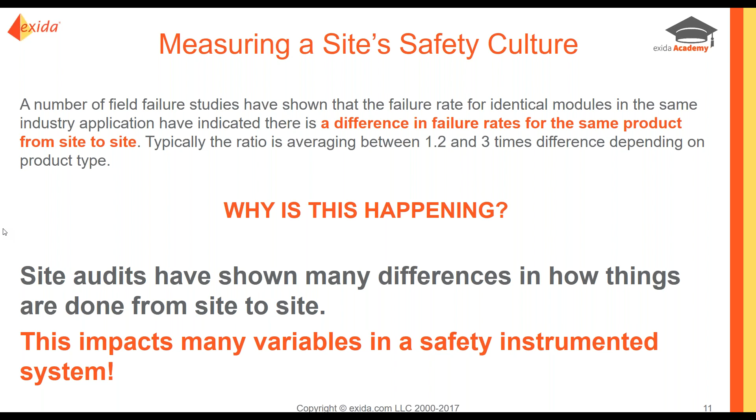So the Site Safety Index will cover all of the variables that can be collected underneath what is safety culture. Safety culture is really the part to play where humans are involved. Safety culture can be an imperfect repair or calibration. It wasn't set up the correct way. All of those things are affected because of humans. I know I am not perfect, and as long as you have humans working in your plant, you're not going to be perfect either. And the more humans do, the more chances that there can be mistakes.

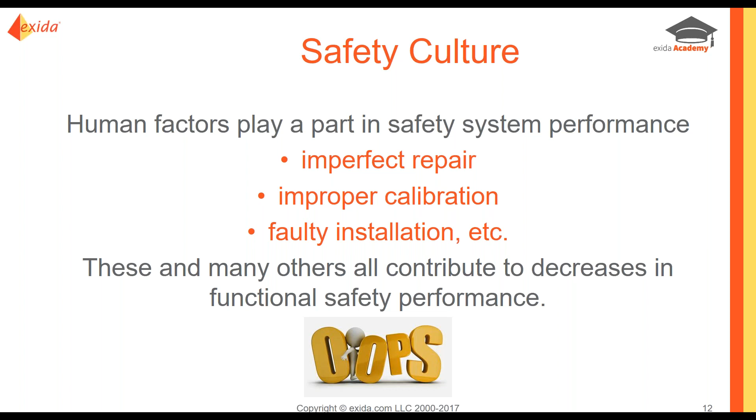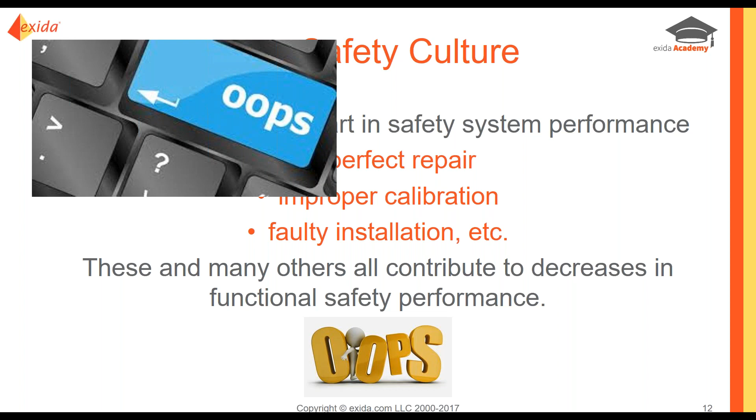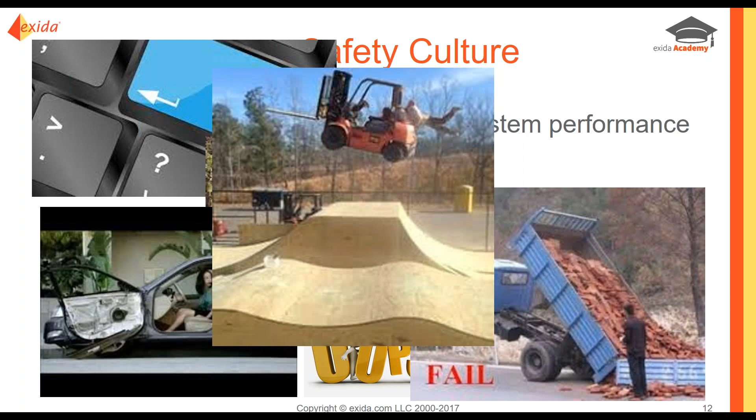Let's think, how many of us today have made typos? I know I've made plenty. My spelling is just plain awful. So I've deleted multiple sentences. But what about even more? Have you done something when you were getting ready this morning? Were you not paying attention and knocked something over? Humans are not perfect. And as long as you have humans working for you, well, hopefully your employees are not going to be doing the things in these pictures, but you get the idea. Things happen. When humans are involved, they especially happen.

But the point is, as long as you have an appropriate safety culture, you can lessen the effects of these, or lessen the amount of these accidents. But if you do not have a proper safety culture, no matter how great your calculations were, no matter if you bought the best, most expensive equipment possible and put it together perfectly, if the safety culture at the plant isn't maintenance-forward, or it's not very good at testing or pushes it out, safety culture can completely cancel out all of the good you did with your calculations, the good you did buying certified products. All of that won't matter because of poor safety culture.

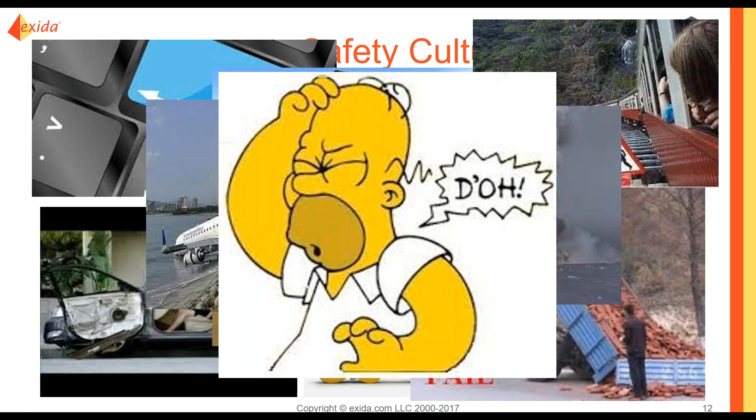Because of this, the Site Safety Index was created, and it was created from all of the concepts based in IEC 61508 and 61511. And from there, we put together an index for you to be able to either self-evaluate or evaluate by third party and see how you are doing. And as I said, as long as humans are involved, the Site Safety Index should also be involved. When you are doing all of your calculations in functional safety, there's an assumption that human factors do not play a part in the safety system's performance. So all of your calculations did not include that human factor error.

So the Site Safety Index allows you to take a more realistic approach and look at what role human factors will actually play. But the second thing: say you have that one company where Site A is doing very great and Site B is doing not so great. You do not want to be punished for your sister company's neglect. So Site Safety Index actually allows you to lower your failure rates because of the great things you're doing, while not masking your sister company.

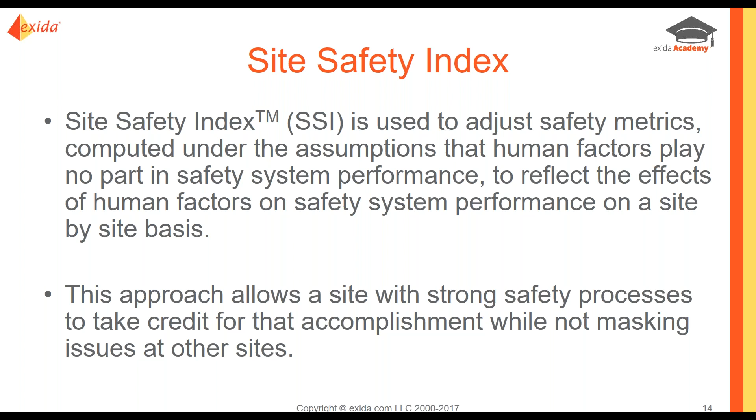As I said earlier, there are two ways you can evaluate Site Safety Index. First, you can have the non-biased approach, an external audit: someone like Exida can come in and walk through, ask a bunch of questions, observe things, and give you a non-biased opinion. That third-party opinion is always a wonderful thing to have. Or you can go through a questionnaire and give yourself a kind of audit and see where you think you fall.

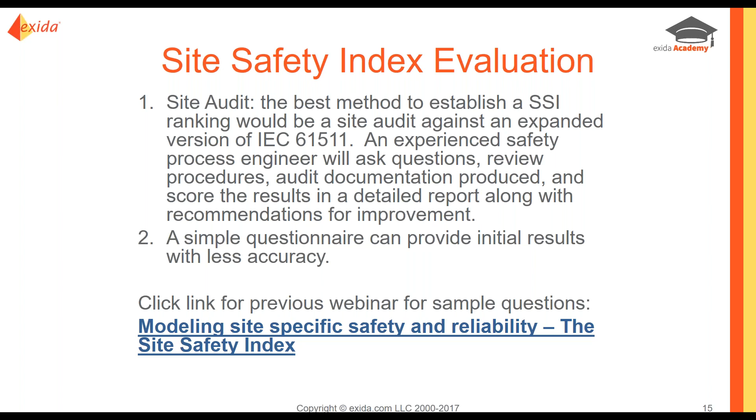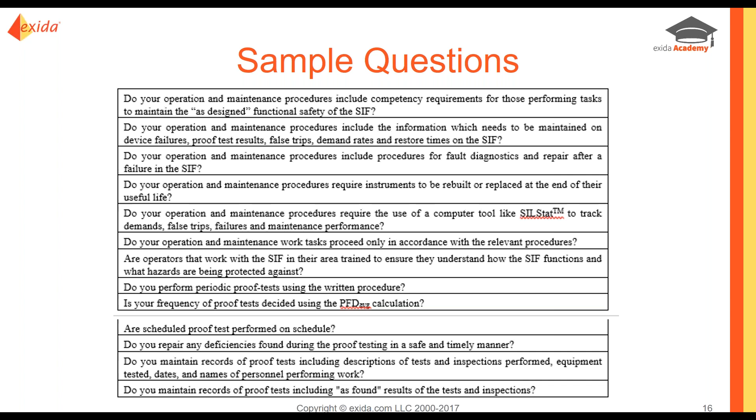Site Safety Index has a website where you can get the questions if you want to do it yourself. These are just a couple sample questions, such as: are scheduled proof tests performed on schedule? Do you perform periodic proof tests using written procedures? Do you pull equipment before the end of useful life? That type of questions. So you can then see about where you fall, or where you believe you fall, compared to others.

The Site Safety Index model is set up kind of like your safety integrity level model. You have Site Safety Index 0 through 4, just like your safety integrity level, or SIL 0 through 4. SIL 0 or Site Safety Index 0 is there's nothing, right? So in Site Safety Index, that nothing means you don't do repairs, you don't do testing, you keep the equipment in. When it finally ends up failing, you pull it out of service, and that's that.

But on the other extreme end, you have SIL 4, or Site Safety Index Level 4. That's absolutely perfect. Repairs are always done on time and correctly. Testing is always done on time and correctly. And you always pull everything before you have any inclination that it needs to be done. Just like your SIL 4, your Site Safety Index 4 is kind of unheard of. It's mythical. It's that unicorn. People have heard of it, but have you really met anyone that has seen one?

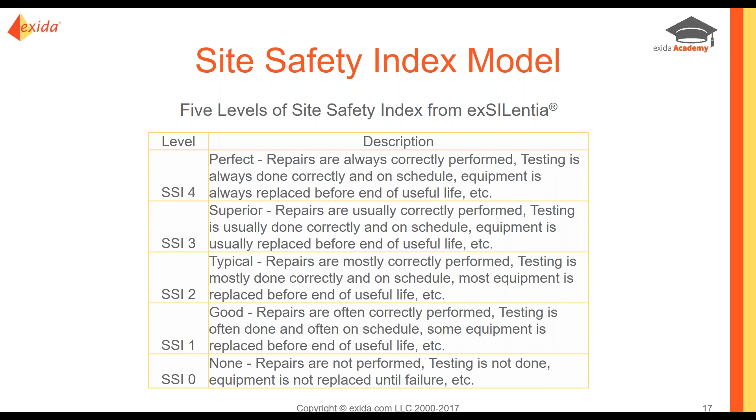Typically, we will assume that people fall under Site Safety Index level 2. You do most of the repairs and testing on time. You do it as correct as you can, but nobody's perfect. And sometimes if you're doing a lot for functional safety, you might be an SSI 3. So I've talked about the different SSI levels. Who cares? Well, it can specifically impact your functional safety.

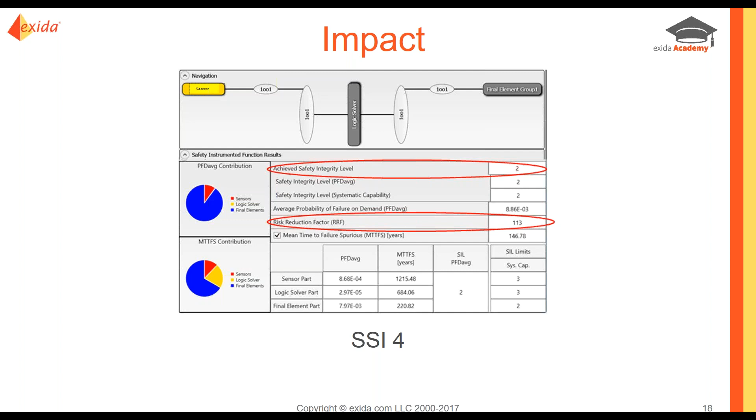I did a quick SIF in exSILentia. This is part of the module if you've never seen exSILentia before. I just did a sensor, a logic solver, and a final element, 1 out of 1 final elements, and ran my calculations and found that for this simple SIF, I was able to achieve a safety integrity level of SIL 2 and have a risk reduction factor of 113. And this is all assuming perfect maintenance, 100% perfect SSI 4.

I then did the exact same analysis, but this time I said that I am pretty dang good. I'm not perfect, but I'm doing almost everything perfect. So this isn't even an SSI 2 or average or typical. This is SSI 3, superior. You have now only achieved a risk reduction factor of 98, which is not too big of a difference, but your achieved safety integrity level is only SIL 1.

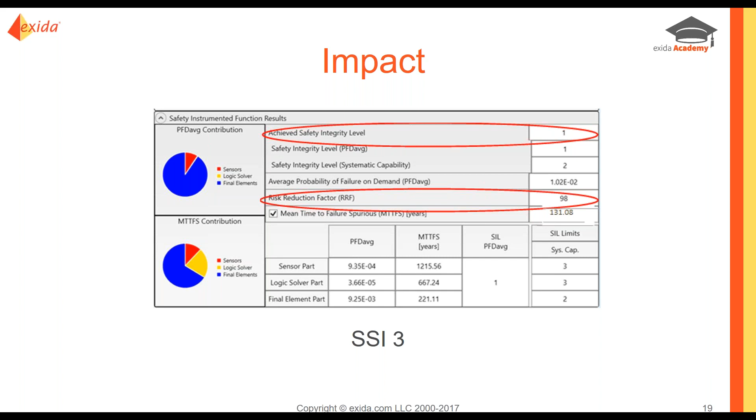And if you've done all of your safety calculations assuming SSI 4, when you are indeed not, you could be assuming that you're running at a SIL 2 level. Well, actually, you are only achieving a SIL 1 in protection. So why is this? Well, a key metric in the process industry and all the design is PFDavg. I'm sure if you are involved in any functional safety, you've heard of PFDavg before.

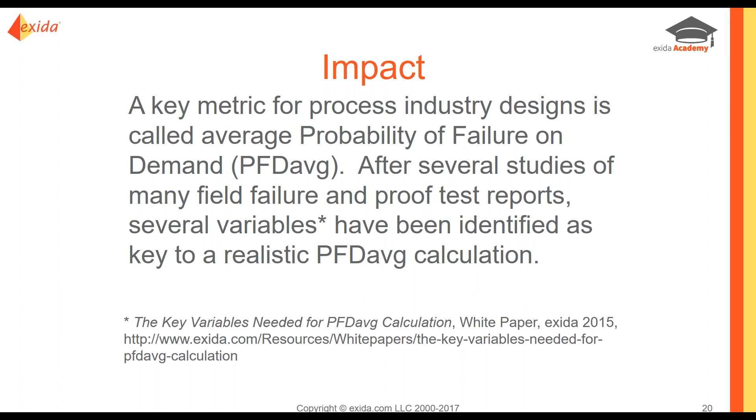And as I said before, we did several studies on many different field failure results and proof test reports, and we noticed there are several variables that have been identified to make that PFD calculation realistic. So you could just use your 100% simplified equations, or you can actually take into consideration 9 key variables in PFDavg. And as you can see, number 8 is the Site Safety Index practice.

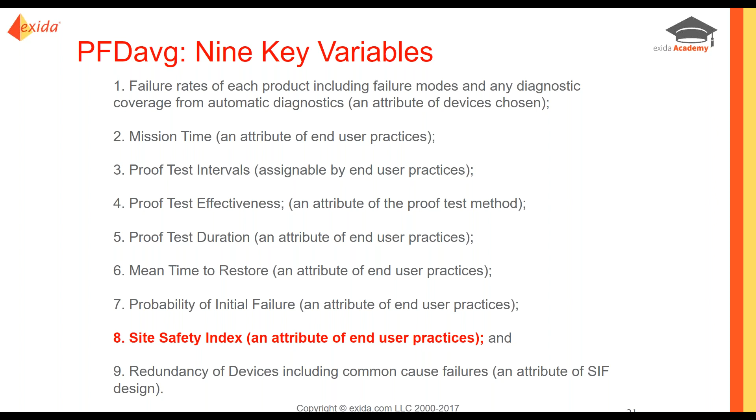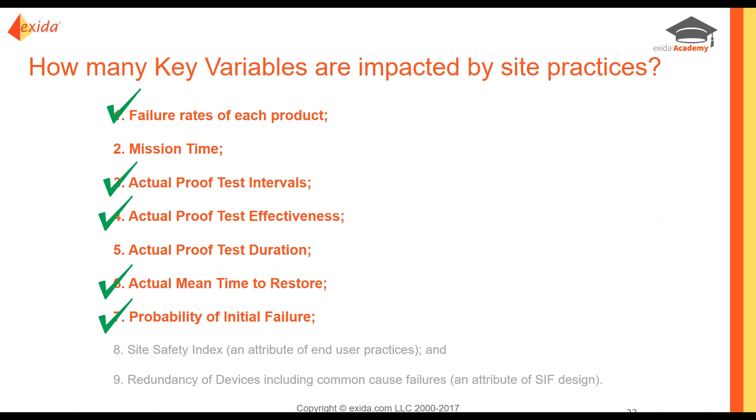Now let's take a look at how many of the 9 key variables are actually affected by site practices. Well, 5 of the 9. This would be the failure rate, the proof test interval, the proof test effectiveness, the mean time to restore, and the probability of initial failure. So the Site Safety Index, as I said earlier, is going to be the difference between your targets, or that unicorn, or what you were hoping to achieve, and the reality of life.

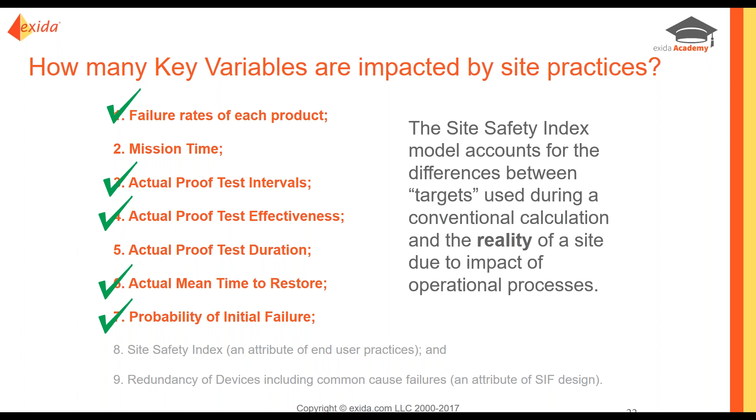So we're going to go through, oh, that's next. Sorry about that. So why is this important? Who cares? Well, the PFD average calculations are, as we just talked about, impacted by those site operational practices. And we can actually model and show the impact of your site practices on your PFD average. Taking that, it could affect your safety integrity level and your risk reduction factor.

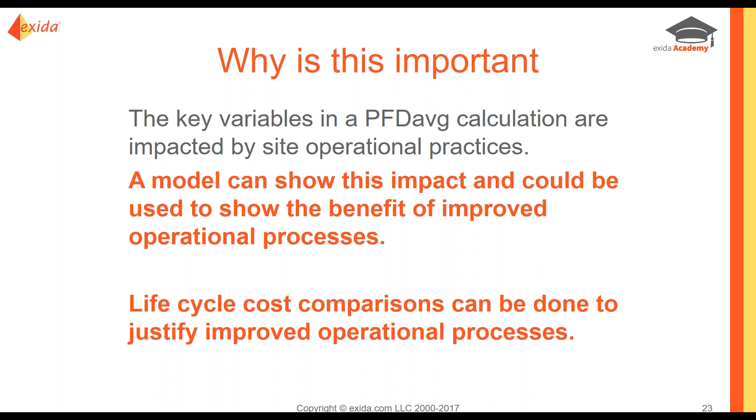So you can actually model life cycle cost comparisons if you're going to be perfect in maintenance, really, really great at maintenance, average, poor, or none. And you can put cost to justify increasing your maintenance and actually show it through functional safety, which is pretty cool. The things that affect your Site Safety Index can include commissioning testing, safety validation tests, decommissioning and modification procedures, repair procedures.

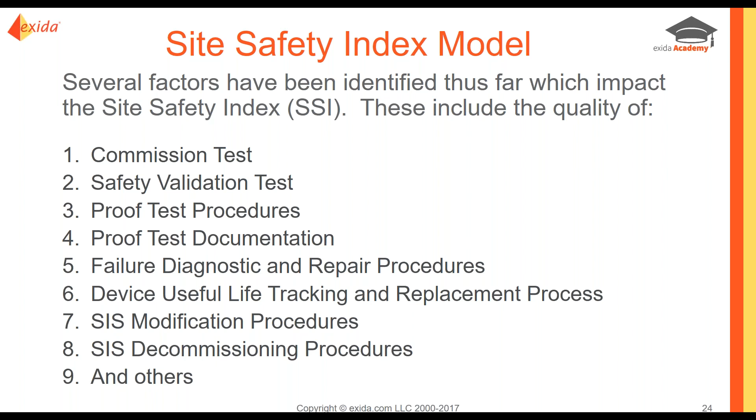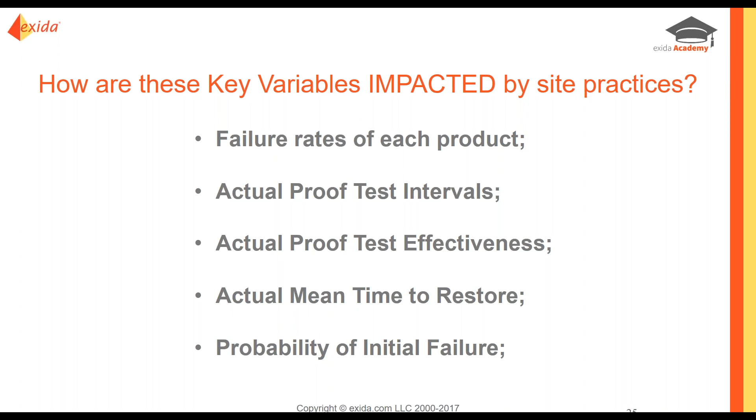So keeping in mind that list, we're going to look at how those key variables are impacted by site practices. And remember the first 5 from the PFD average calculation. You have your failure rates, proof test interval and effectiveness, mean time to restoration, and probability of initial failure. We're going to look at each of them in depth a little bit more.

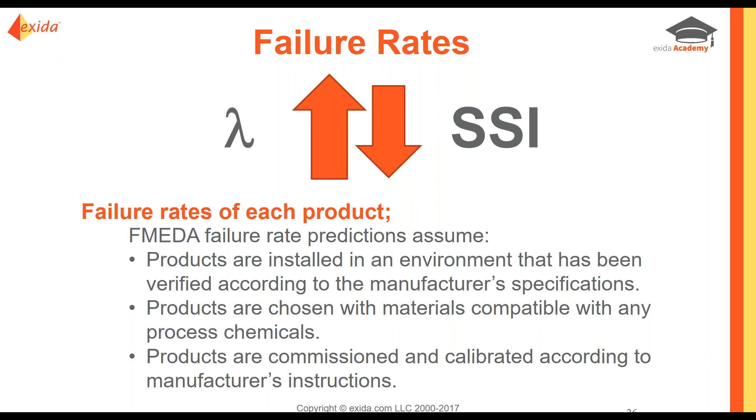So the first one is failure rates. As you drop site safety index levels, so as your maintenance gets poorer and poorer, your failure rates are going to increase. Why is that? Well, your failure rates come from an FMEDA, and your FMEDA makes certain assumptions that you're actually doing the things you say you're going to do. The products are installed in the environment that's supposed to be, with materials compatible, commissioned and calibrated per the manufacturer's instructions, and so on. So if you're not doing the things that the FMEDA assumes that most practices are, you're actually going to have higher failure rates.

The next is proof test intervals. And as you go lower and lower through SSI, so as your maintenance gets worse, your proof test intervals are increased in those lower SSI levels. In a survey that we did, it's apparent that proof tests are postponed more often when a higher level of discipline is not present. So as you get lower in those SSI levels, and you maybe don't have your company-wide parent procedures, maybe one area is a little more lax from site to site. So as you decrease your site safety index level, your proof test intervals end up increasing.

While the opposite is true with effectiveness. Proof test effectiveness decreases when procedures aren't clear or when test personnel don't have the time to perform the testing or to document the testing.

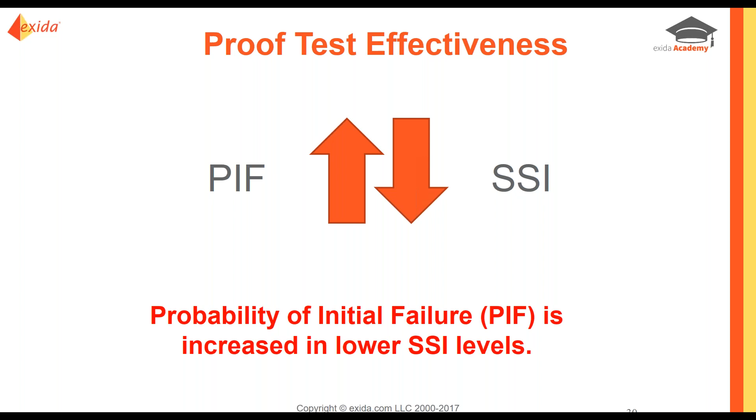And then finally we have probability of initial failure. And as you decrease in SSI levels, your probability of initial failure is increased. So products used in the safety function may not operate properly if they haven't been properly installed, or maybe not calibrated, or not tested after commissioning. So when procedures are not clear and there's just no time available, the probability of initial failure is going to increase.

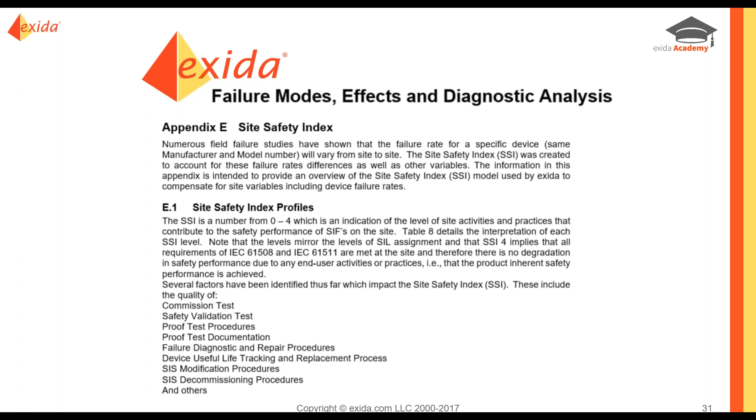So where does this come about? Well, as I told you, you can get information about especially failure rates in the FMEDA analysis. And in this Appendix E, there's all about the Site Safety Index, and there's two new tables. So firstly, this is an example, table 9. In the regular FMEDA report, you're going to have SSI level 2, your typical or average. Then in the back of the FMEDA report, it's going to give tables for SSI 4. So you did do the questionnaire or had a third party come out, and they let you know that you are actually at a higher safety culture level or higher maintenance.

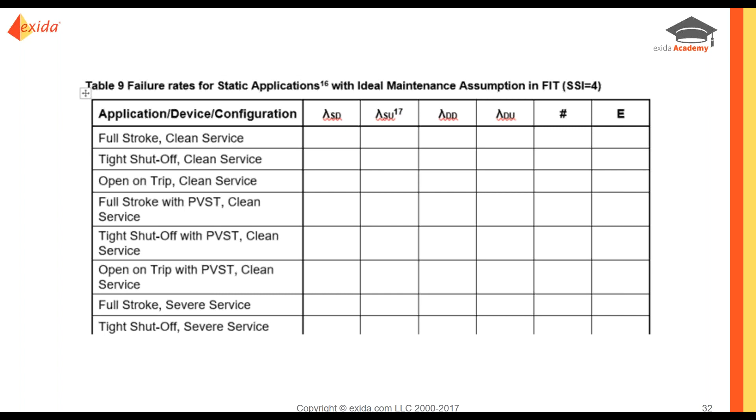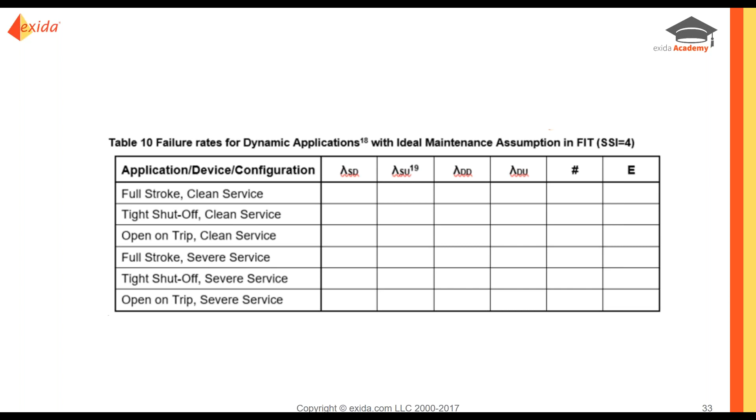This will give you tables in static, and then also the next table in dynamic operation, assuming SSI 4. And those failure rates will usually be lower, depending on what parts are in the FMEDA, of course, but those usually will be a lower failure rate.

So, wrapping things up, the Site Safety Index lets you be more realistic when you're doing your PFDavg calculations. It allows you, if you're doing a really good job, to take credit for that while not covering up your sister company's errors. And we talked briefly about how you can justify improved operational processes through monetary terms, showing that being a little bit better could save you money.